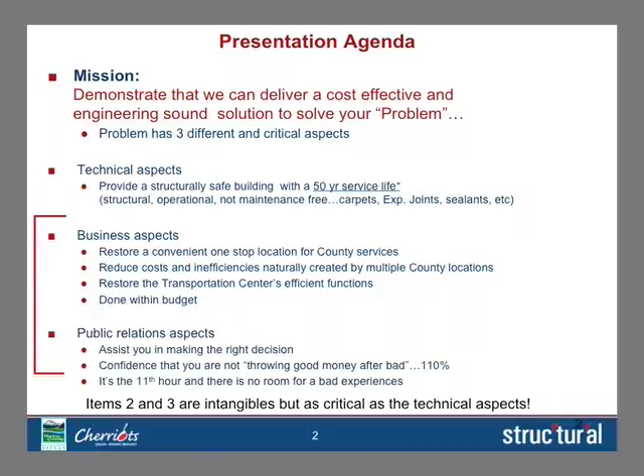So we're going to go through a process here that we'll talk about very briefly. I know in our proposal we went through all the people's resumes here. We don't want to stand and beat on our chest, but we're going to go through the companies represented here briefly, the individuals, just as things that relate to what they bring to the table.

But more importantly, we want to go through how we're going to operate as a team. We have multiple companies here. We'd like you to understand what are the roles and responsibilities, lines of authority, and how we produce a seamless project using a team like this, and how we've done in the past.

We started out, after the RFP went out, looking at, well, we started before that, but physically on site. We wanted to get a handle on the forensic side of what's going on in the building, and specifically to get a handle on whether we agree with what's been found on a couple key items in testing of the building or evaluation. And we want to tell you what we found, what was consistent, what wasn't in that process.

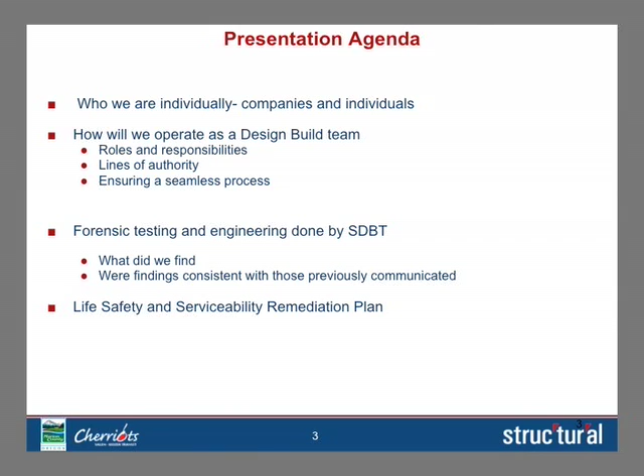And then we'll present our life safety and serviceability remediation plan.

We also want to just take a couple minutes and have you understand this is a construction process, and we want you to understand our culture, how we run a project of this nature in an operating facility. And of course, we're going to talk a little bit at the end about schedule and cost and closing remarks.

So to start out, Structural Preservation Systems will be basically acting as the general contractor and contract holder in this process. We are recognized as the industry's leader in this business in the strengthening and repair of concrete structures based on the fact that we have done 15,000 projects in repair and restoration.

And in the design-build world, we have been trusted with structures on design-build teams on structures like the Guggenheim, Fallingwater, the Supreme Court, IMF, the New World Trade Center, and some structures that aren't so marquee like you see there on the right, that refinery in Texas. That ugly-looking structure makes $1 million a day.

And people put their trust in us to literally hold that structure up. It weighs 2 million pounds, and we take the beams out from under it and put it back together while they're online so they can keep operating. And we have a history of doing these things out of town and linking up with local other businesses like you see sitting here. We're about a $400 million financially strong, very capable company from a capability point of view.

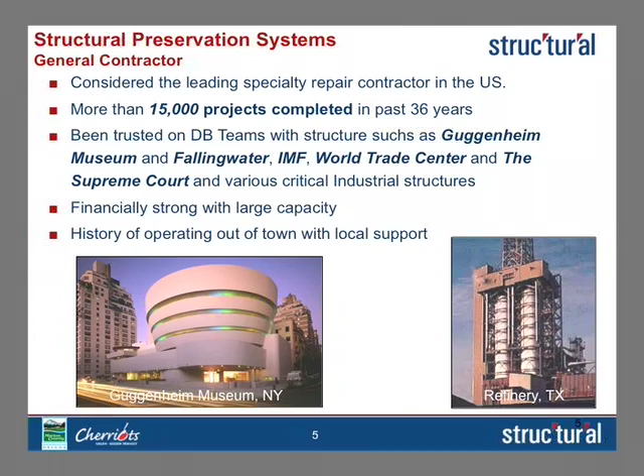WDP represents one of the industry leaders in the evaluation and repair of post-tension structures and building facades. They've done over 700 projects, and they also have some very good expertise in forensics, which is very valuable in this process.

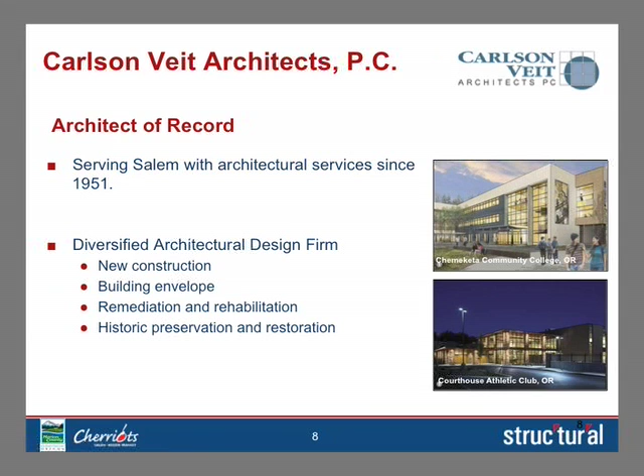You probably all know Bill Pease from BMGP. Bill Pease's company has been operating since 1925, as well as Carlson Veit, who is also a local company here in the architectural world since 1951 and has been involved in a couple of notable projects here.

Dalke Construction, actually one of the oldest family-owned construction company in the state, has done about 1,000 projects in 90 years. They will be acting as a local contractor to work with us through some contract arenas, and I'll go through some of the details.

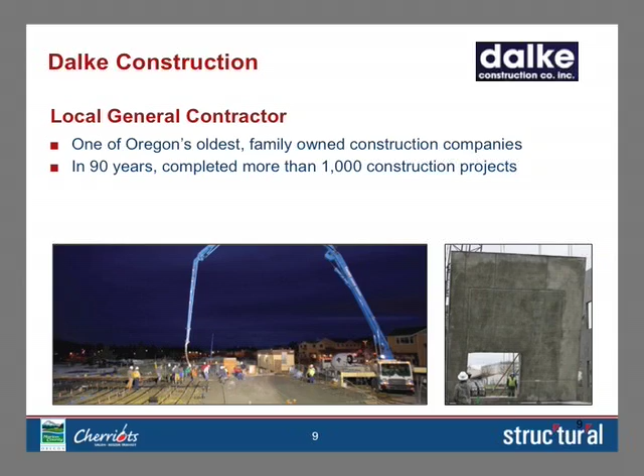We've also connected with MEP Consultants EESI, who did the MEP analysis for you. We felt they'd be a great fit since they know the building well. When we go out of town for jobs like this, local flavor and spirit helps, and there's a lot that can be done by local carpenters, workers, and businesses that's way more efficient than shipping people into town.

This is a pretty typical process for us. BMGP will act as a key part of this, as we typically do when we go out of town. BMGP brings us local support - I'll show you our design process, and basically they're going to peer review everything we do. We're not putting them in a position of figuring out specialty engineering, but once it gets to calculations, it's simpler for an experienced company like BMGP to peer review our stuff, as well as they're very experienced in how the local building officials work here and how the process works.

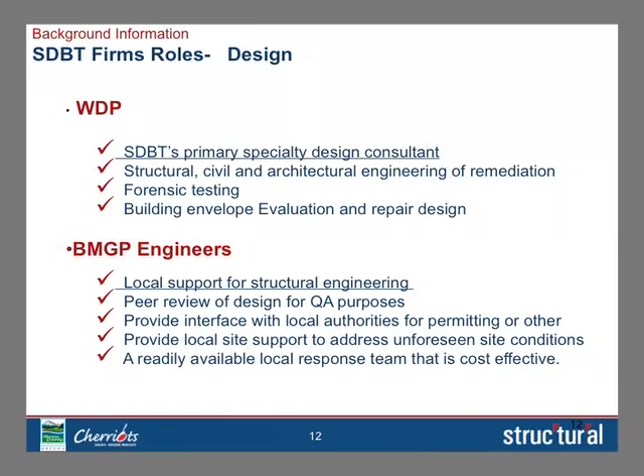This is a restoration project, and I guarantee there will be changes and unforeseen conditions. We want an experienced engineer set of eyes that's within minutes of the job site, not having to get someone in here a day later. We want to connect Bill Pease and the engineer of record to communicate and work things out with somebody local. It's just more cost effective and keeps the process going.

Carlson Veit will do architectural work in this process, more on the building envelope, but mostly things that could affect ingress, egress, parking issues, fire, and LEEDS rating. For example, we're going to be doing enlarging of concrete elements in the building, so we have to be careful about space and ingress and egress. There's things we're doing to the fire system because we have to move it out of the way and make sure it goes back in the right manner. There's also some architectural finish items they'll support us on.

EESI is going to help with the commissioning and renovations of some of the things they've already told you about.

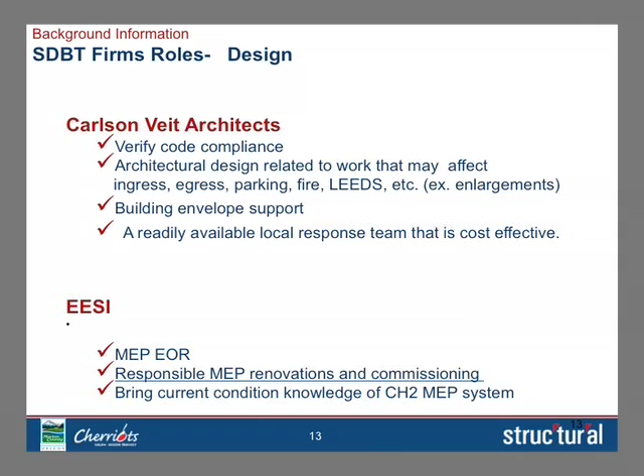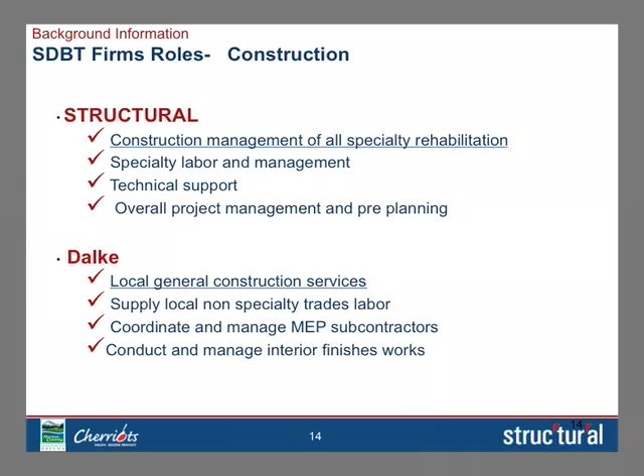We'll handle the structural work, all the heavy lifting with the strengthening aspect, bringing people out here with specialty construction experience to do that. However, a good portion of this job is local carpentry and labor support. A lot of it is finishes and MEP related, and Rich's group is going to manage that level of subcontractors for us and do all the finish work.

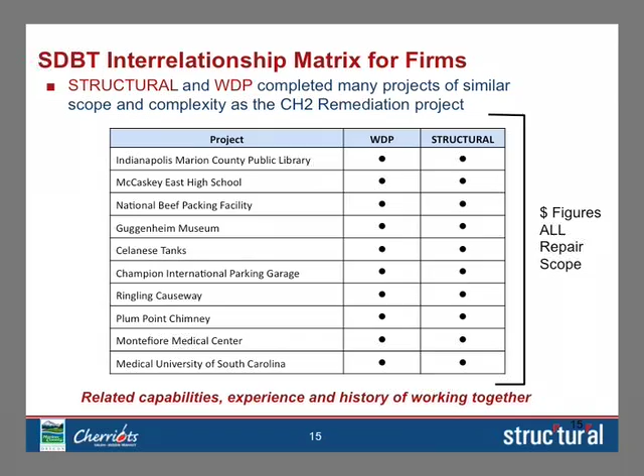One thing that's interesting - the numbers we gave you for those projects, the dollar value, is pure strengthening and remediation. It's not like $100,000 of strengthening work on a $5 million restoration of a building. It's all strengthening work.

Dr. Randall Poston is literally one of the go-to guys in this industry for any type of post-tension issues and structures. He's been in the business about 31 years, and he's the chair of ACI 318, which is the worldwide Bible for how you design reinforced concrete. He's the Peyton Manning of that world.

Also at WDP, who's going to be a structural engineer, is Dr. Keith Kesner.

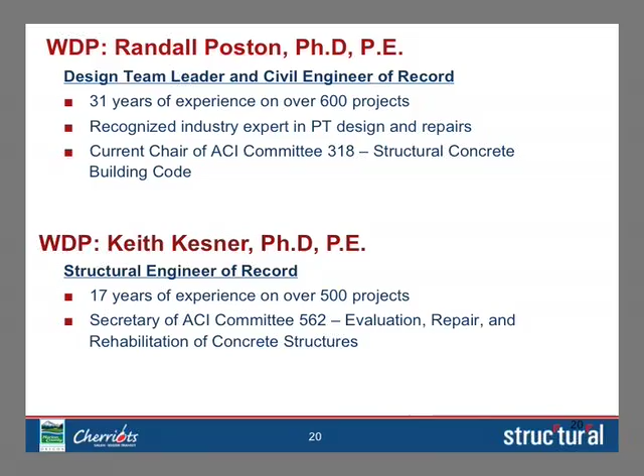And he's an official on a committee related to what we're doing, because it's the committee that defines all the repair methods and means that happen in the engineering world for repair.

Eric Peterson with WDP has been 19 years in this business, focused just on building envelope work. He's actually the chair of the society that deals with existing masonry structures and the repair of them. I'm not going to go through all their years, but you can see up there, a couple years of service and a lot of jobs.

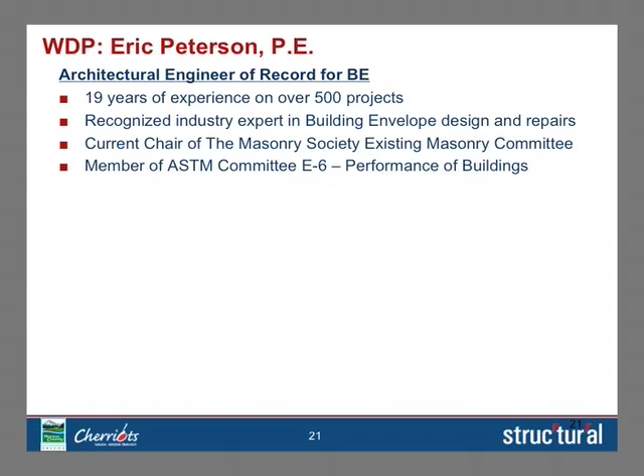Dr. Alkhrdaji works with structural. He is past chair of ACI 440, which is the design guideline worldwide that was developed for how you install FRP and how you do the design. He's been in this business for about 18 years.

I also am part of that committee, and I've got about 30 years experience in this business and have been involved in about 1,000 projects very similar to this.

So to start with the forensic thing, what did we find and what was consistent with what? Our goal really was just to get a feel for it, there was some conflicting information over time, and you had a lot of reports done in the last few years, and we wanted to get a handle on what was up. Some were consistent, some weren't, but it wasn't money badly spent. Because of the volume of testing, and we tested consistent areas where they did, it allowed us to understand what was consistent and move on to the next thing to look at. So they were actually very valuable to us in the process.

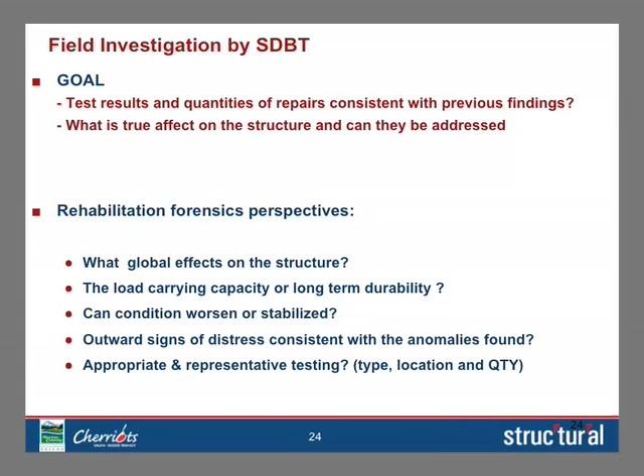The other thing is we want to understand what the true effect on a structure is. When you do forensics on an existing structure, especially when there's a defect involved, you can't just look at the lab notes. You basically have to figure out what's going on globally with the structure. Has it affected something as extreme as the load-bearing capability, or is it a long-term durability issue? Is the problem stabilized? Does it grow worse every day? Are there outward signs that are consistent with what you found in the lab? And then, how much testing do you do? How do you do it? Where do you come to your conclusions?

So what we've done in the last couple months is some visible observations, concrete core samples, ground penetrating and surface penetrating radar, which looks into the structure so we can see the reinforcing, and fiberscope, which is a fancy little microscope you can use to look around the back side of a corner and inside holes and things like that.

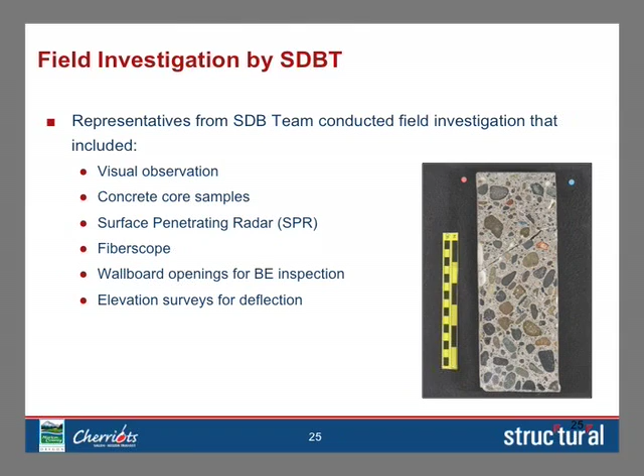We took a lot of wallboard out and looked behind it, and we also checked some elevation issues regarding this deflection thing. So I'm going to go through these briefly, but I'll spend a little more time on the first couple because they've been issues that have really been on your mind. You've been told things about them.

They've made the paper, and the first is the strength of the concrete in the structure, which was designed as a 5,000 psi structure. We sampled the same locations on every floor where you had a test before, so we had cross-reference. We tested these cores for not only compressive strength but also tensile strength, and I'll tell you why that's important in a minute. We found that the results were consistent with what you've been told. Some are above, some are below, but they averaged out to about 4,300 psi. So there's been numbers anywhere between 4,000 and 4,300 - pretty close to each other.

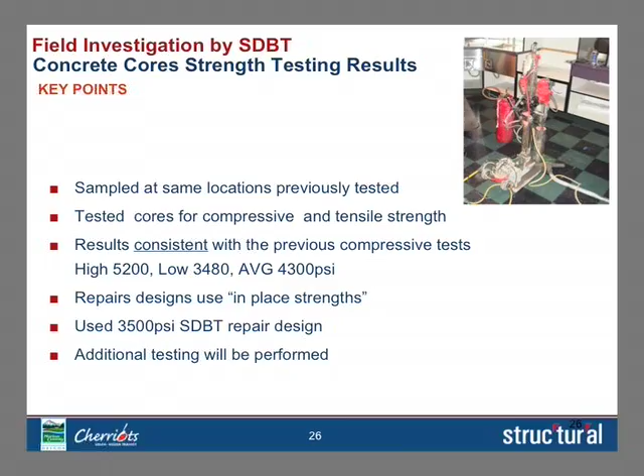So the concept here is the concrete strength is what it is. What you do is use the in-place number and reevaluate what the structure does, and you model it with that. It's not deadly that the concrete is a couple thousand psi lower - you just have to figure out what the effect is, model that, and see what it does. Since we're strengthening it, we can take that real existing capacity and work up from there. So it's really not a deadly issue. Matter of fact, all our modeling took a very conservative approach - we only used 3,500 psi in our design, and we're still able to meet the criteria to upgrade the structure. As we're going through the project, we would actually do more testing just to make sure that 3,500 is okay, and if it's not, we would adjust.

The other issue that's really been a hot potato is the micro-cracking in the concrete, which has been described as the aggregate disbonding from the cement paste.

If you look at concrete, it's basically 75% aggregate, from little sand to big stone, glued together with cement paste, which is about 25% of it. When it cures, it looks like a big dense material, but it's really not. It's just a big hard sponge.

In our petrographic review, we found two types of cracking in the concrete. The first one started in the concrete and went around every piece of aggregate. Why is that important? Because you might jump to the conclusion that it's disbonding.

When the concrete cures and becomes this big hard sponge, it's so cohesive that when you have problems—what they call delayed deleterious phenomena, something happening that creates this cracking—once the concrete is mended together, those cracks will literally go right through the aggregate. It's acting like one piece. All the micro-cracking we saw in all the other reports goes around the aggregate, not through it.

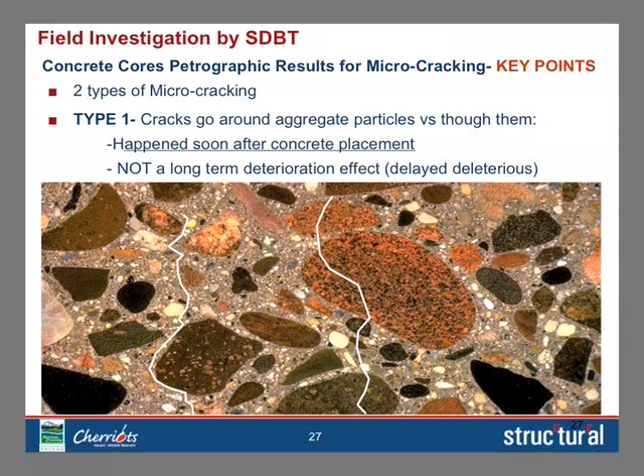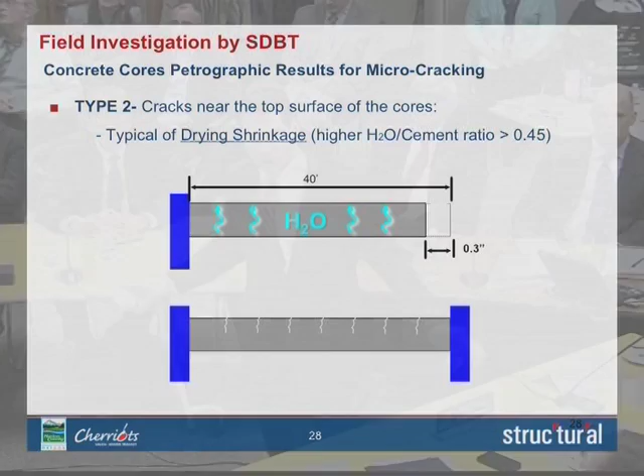The other type of cracking we saw was drying shrinkage cracking. Looking at the petrographic cross-section, it occurs very close to the top surface. Concrete shrinks because when you pour it, you add excess water to make it flow, and that water evaporates. To give you perspective, a 40-foot piece of concrete will shrink about 1/3 of an inch with a good water-cement ratio.

In the reports you've seen, the water-cement ratio on this concrete is kind of high, so more water has to come off—it's going to shrink more. If that slab is restrained by the columns, which it is, at that water-cement ratio you'd expect to see some minor micro drying shrinkage cracks. They occur at the top and do not go down through the section.

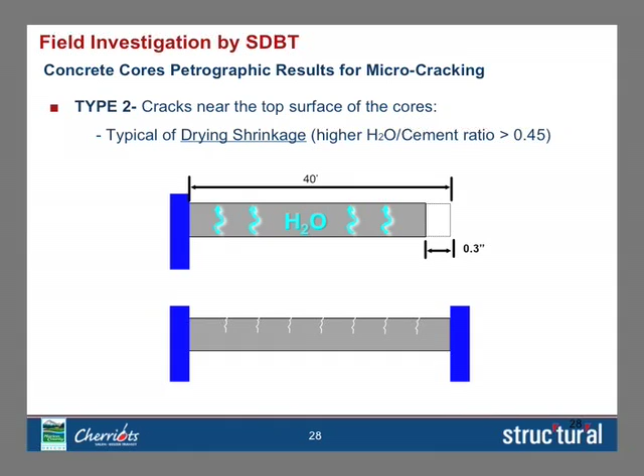In conclusion, we do not feel in any way, shape, or form that micro-cracking affects the integrity of this concrete, long-term or short-term. We base that on having two petrographers look at it, and there are no outward signs of distress, which you'd expect to see if this were debonding.

The real kicker for us was testing the tensile strength of the concrete. If there were disbonding between the aggregate and the cement paste, and you tried to pull that concrete apart in tension, the numbers would be super low. But all our testing showed typical numbers, well within the normal range for concrete at this compressive strength. So we do not feel that's an issue at all.

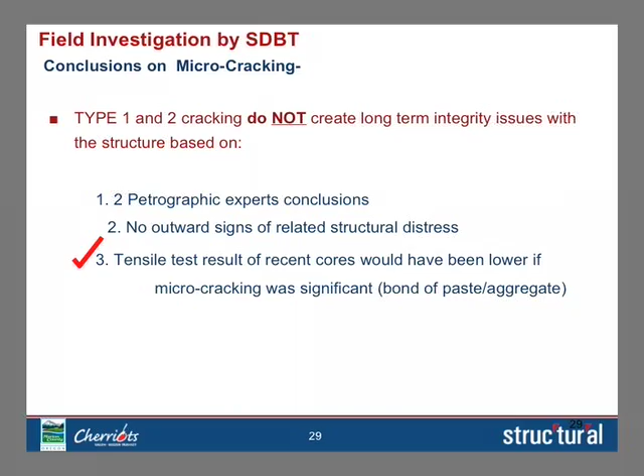Another issue with a little more legs—I read in a blog or a comment in the newspaper last week that someone said they could see the deflection from outside the building. This building is 12 years old, and there are two types of deflection. The minute the concrete cures and you pull the shoring out, there's short-term deflection—it's the load, the weight of the structure, no matter what you do, especially with monstrous spans. A 38-foot span on that outside bay is unheard of with the type of construction that was selected. You would never do that if you know what you're doing.

There's a way we can calculate what's acceptable. It's going to deflect—you can't stop it. By Oregon code, the allowable number is pretty simple: you take the span in inches, divide it by 240, and that tells you what the center deflection should be.

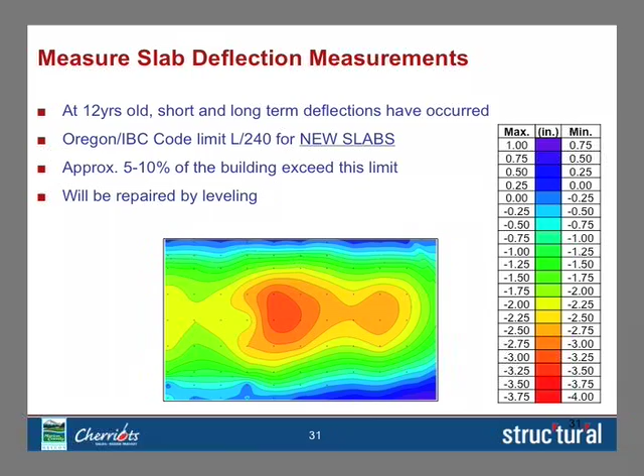Given that, we went around the building and tested a lot of areas, especially the ones showing up on that dramatic-looking colored graph with the deflection data. Our numbers actually concurred with that. But we also found that only about 5%, maybe a max of 10%, of what we checked—by square footage of the slabs in that building—actually have deflection that doesn't meet that L over 240 standard. And where they do, our plan, as we'll show you later, is to level them out.

And then on the building envelope, we found some interesting things. We agreed with what SERA came up with. There were a little bit more water leakage situations going on in various parts of the building. We had the luxury, by dumb luck, of being in the building during your January monsoons, which the wind and amount of rain is probably more than what Eric does when he goes out and does a water test on a building. So we pulled a lot of drywall off, and we were really able to see what was going on.

And we'll explain some of the details of what we found. The roof membrane looks to be in good condition, needs a couple minor repairs, but the exterior masonry has been displaced so much, in multiple occasions, notably at the 5th floor and the corners.

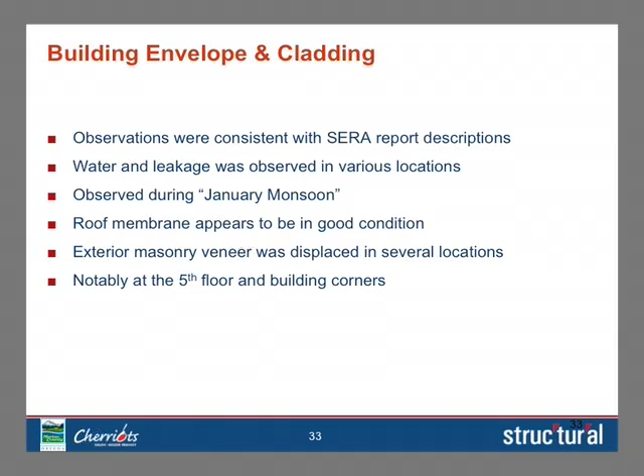I'm going to start going through some of our life safety repairs, what we found in the process, and then I'm going to go through the 3 structures, and then we'll go back to the serviceability.

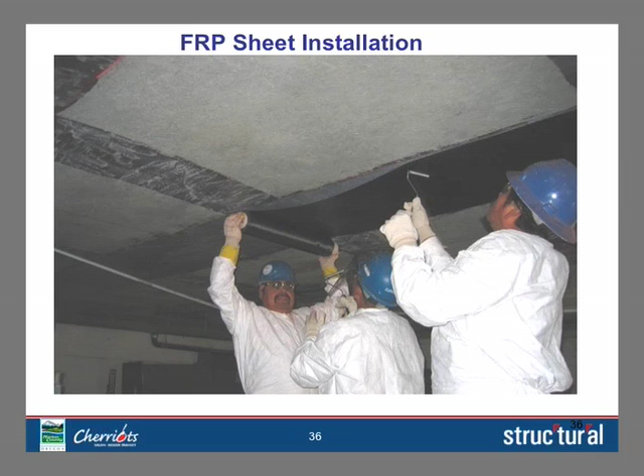But before I do that, you've probably seen this, there's 2 specific repairs the bulk of what we're talking about here will fall into. One is taking this carbon fiber material and basically adhering it to a structure or wrapping it around a column. When you have to go beyond that, now you're into a different technique. It's basically section enlargement. It's a very fancy word for we're going to add reinforcing steel and concrete to the structure, and we're going to make a slab thicker or a column bigger or a beam deeper.

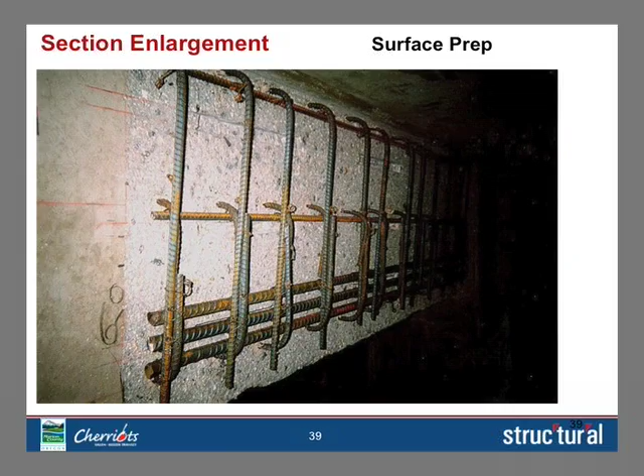And in order to do that, the tricky part is it's not like placing concrete, because at the end of the day, these 2 materials have to act compositely. So you can see the process starting here. It's a process where you have to really roughen the concrete, and then we form it up and we pump our material in there, nothing exotic, until we get it filled, and that's where it changes.

Now we have to pressurize that form, because I described concrete as a hard sponge. Our mission is to get that new material, which is a custom mix we use, a very flowable mix. We're going to literally pump it and pressurize it so it goes into the pores of your existing structure so they're one piece. If they do not become one piece, or composite's the word, basically you've added some dead load to the structure, it does nothing. So that technique is a pretty specialized technique in this process.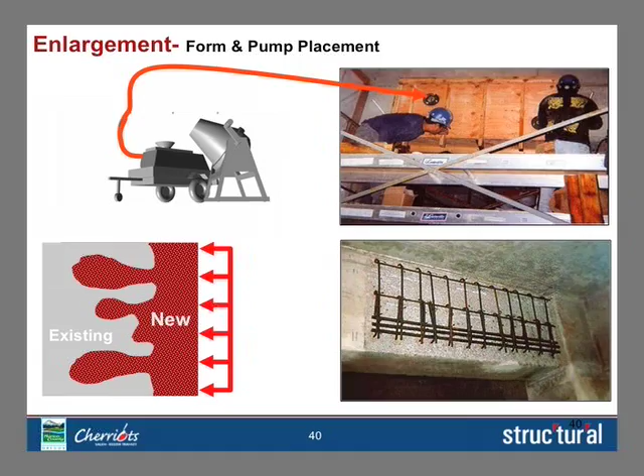The other issue with the slab, and you've heard about this probably ad nauseum, is related to the amount of post-tensioning in that structure, and the forces in there have shrunk the slabs. And you've probably heard the term elastic shortening or shrinkage.

What we found was very consistent with the SARE report, but we have a different conclusion of what some of the results we're going to do are. When you put 350 to 500 psi, which is way more than you would ever do on a normal structure, but we understand what the engineer was trying to do. There were such long spans, they had put so much post-tension force to keep that long bay span at the edge of the building supported, they had to do that.

Now, what happens is when you have that structure under that tension or compression for so long, it shrinks. And you can calculate what that shrinkage is over time. But there is no real code that says you can't put 350 to 500 psi. What it says is, if you put 350 to 500 psi in there, you better account for the stress or the relief of that as that building wants to move. Because if you lock it up, you're going to have all kinds of problems. And basically, that's what's happened to your facade.

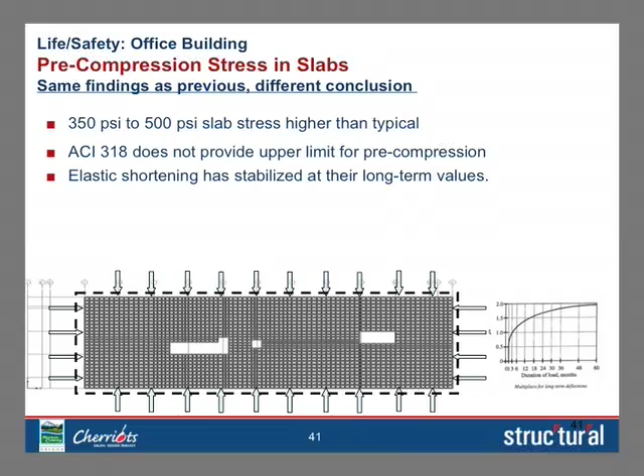Now, elastic shortening has happened. You probably have had 90% of that happen. We've calculated what it is. We've compared it to the SARE measurements. They count. So that shortening, that force, is all basically shrunken. It is what it is now. It's not going to change anymore.

What's interesting is, when this is from the SARE report, if you look at the second floor, third floor, as you went up the building, that elastic shortening got more and more and more. It could have been related to the concrete quality or stressing, but at the top floor, at this roof, the shortening was much less. And the only thing we could come up with out of the old reports was they added a chemical admixture to the roof slab that reduced the shrinkage.

It was a shrinkage compensating admixture. So maybe that, or maybe there's less post-tensioning, but for whatever reason, the difference between where that shrunk and where this shrunk is the biggest in the building, which is why there's a major problem with the facade at the top of the building. It's trying to pull it in, and it can't.

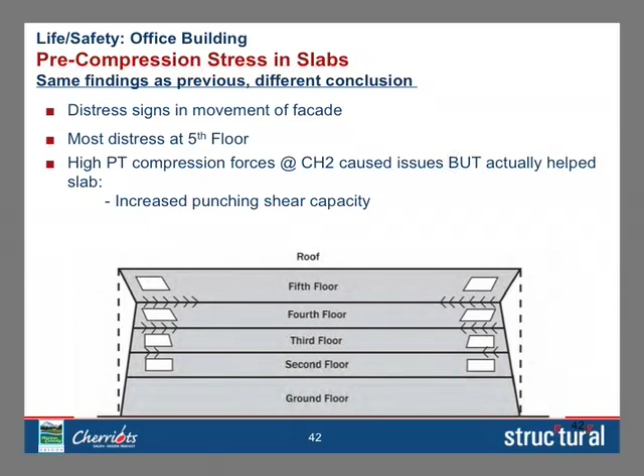And believe it or not, your building uses studs to hold that masonry system in place. It's a very flexible system. Some people like it, some people don't. But if they had used something more stout, you'd have had a major problem. Luckily, it was flexible enough to move to where it did. It probably would have been much worse if it was a different type of facade.

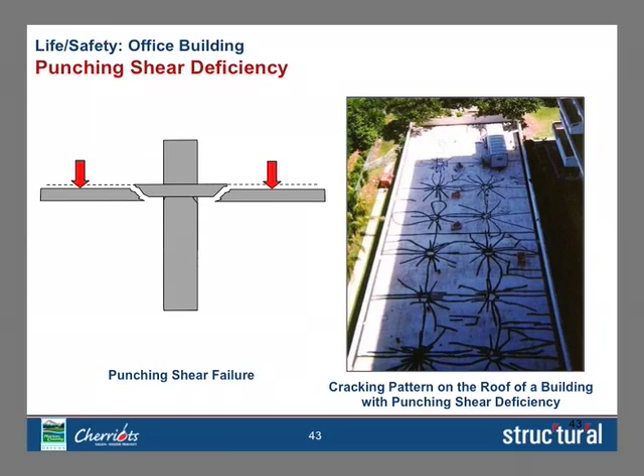The other thing with the slab you've heard is punching shear. You've got a situation where, kind of like my pen in this paper, the slab's trying to punch through. And it's a pretty dramatic failure.

What we selected was drop panels. We are going to enlarge the bottom of the concrete, and the size of that depends on how big the span of the column is supporting. As described before, we'll roughen the surface, add reinforcing steel, pump into that void overhead, and pressurize it so we drive the concrete into the pores. You end up with a nice piece of concrete in the structure, fireproof, looks like the rest of it, and it solves your punching shear problem.

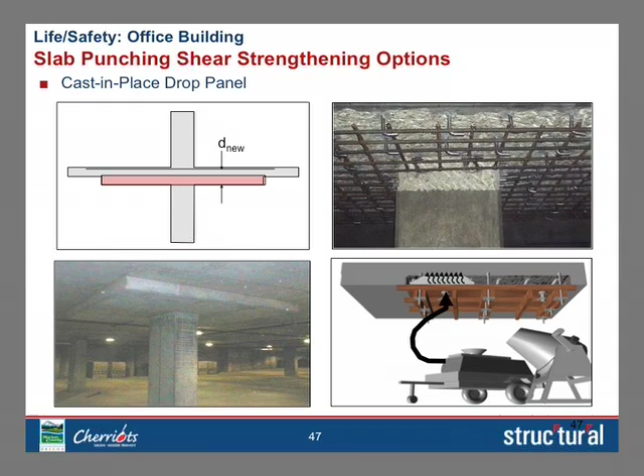Another thing we found was some column issues that were reported in the SARE report. On the first floor, you've got these very high, 16-foot slender columns, meaning the width to the dimension of that column is a little bit thin for what it should be. The concern is not the axial load. The concern is it's so slender, it could buckle. So these were not identified in the other report.

And then on floors 2 to 5, just about every column has a problem with axial force and bending. Unfortunately, given the percentage, we cannot just wrap carbon fiber around it. It will not meet code.

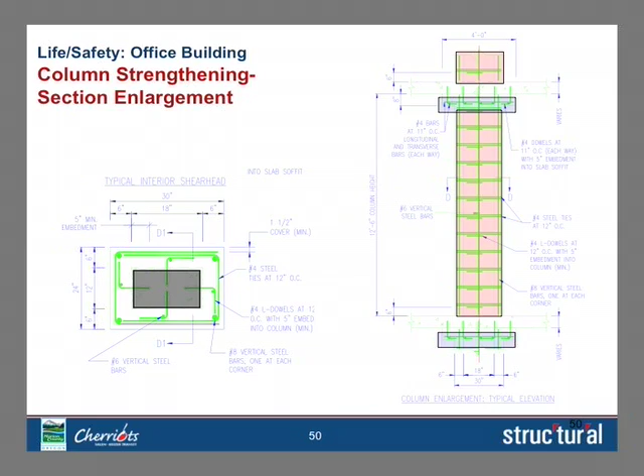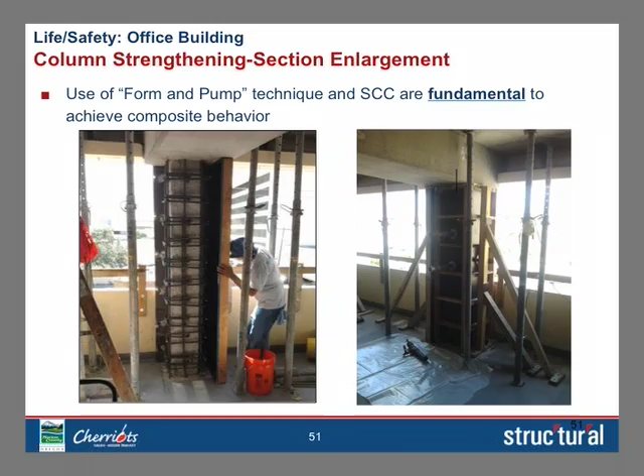The other issue in the building is the bending capacity of the slab in the office building, and the bending between the columns, basically how it's bending in the middle. So we're talking about having to do something on the bottom side of the slab between the columns to strengthen it. There's an existing amount of steel, and we obviously can't put steel back in the concrete. So what we're going to do and proposing is to put an equivalent amount of carbon fiber on the bottom side of the slab in those areas to be equal to that steel.

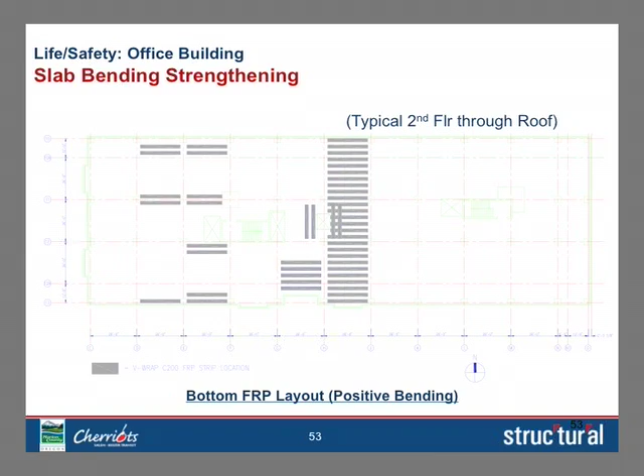And it would look like this. We would glue it on the bottom in one direction or two, depending on the design.

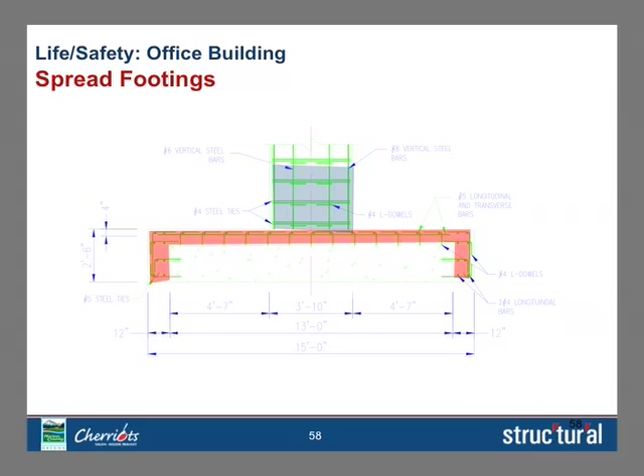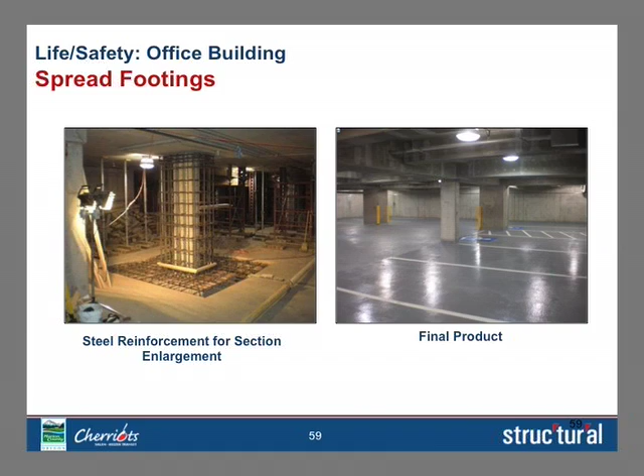Then the other thing that has been looked at in the building is the lateral support. It's the building moving as a whole, north, south, east, west, during a seismic event or during wind or things like that. The things that keep that building strong doing that are basically your west core, your stair tower, and your east core. They stiffen the building. Only the west core was shown to be deficient, which was noted before. We found the same numbers that SERA found.

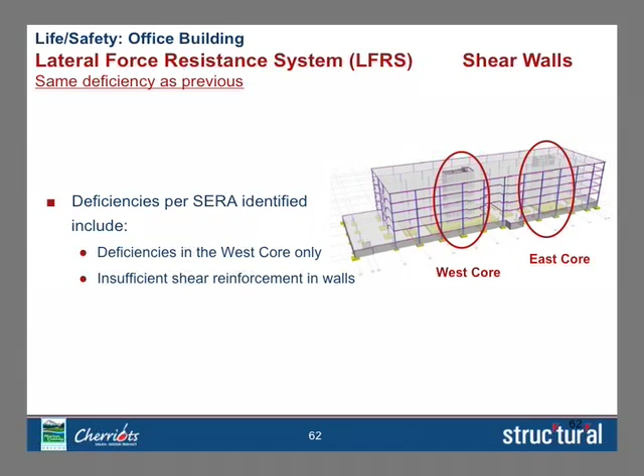Here's the stair tower, look at that in cross-section. What we found was some of the walls were deficient in shear, basically. That's why you see those cracks in them, in shear, and they're less than a 15% deficiency.

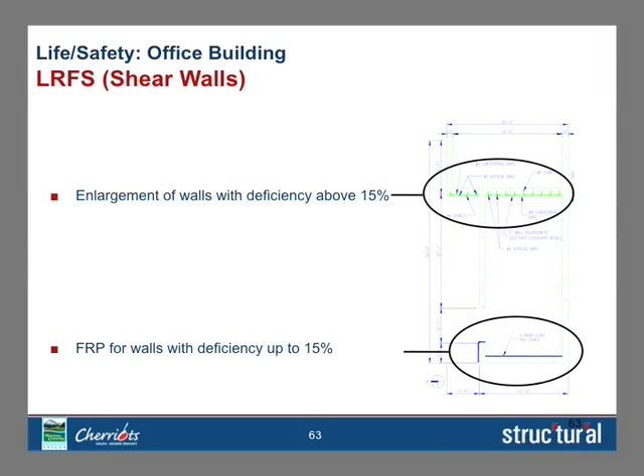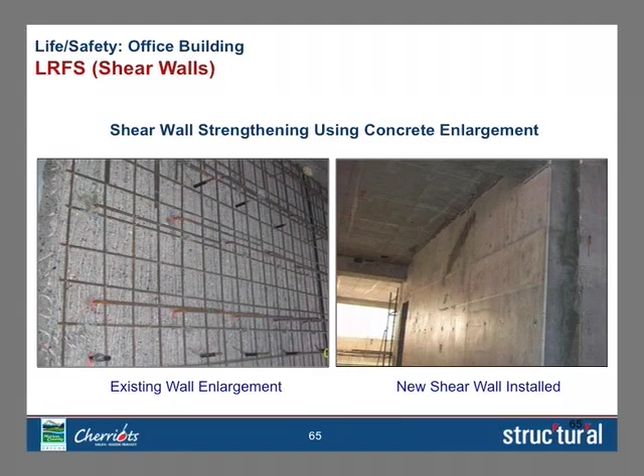We're in ingress-egress areas that have very tight tolerances for that purpose, so we'll have to design these things so that they are thick enough or thin enough to meet that criteria.

Let's shift over to the transit mall, which is a 10-inch slab with a brick paver system on it. Some forensic work was done, and they note that the membrane underneath on the deck below the pavers was probably not the right type of membrane. It was basically too soft.

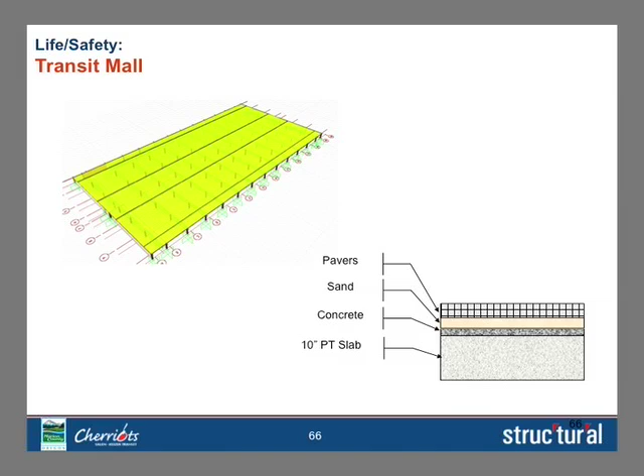The protection board that was under there was not done correctly, so it allowed it to slide around. The sand that was used was not the appropriate sand. The slab also has excessive, compared to normal construction, pre-compression in it. It's got an awful lot of post-tension force.

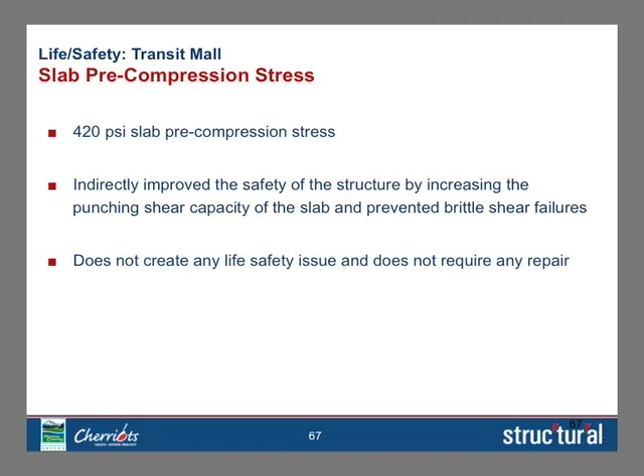However, again, like in the building, there's a lot of punching shear deficiency in that, and that's probably what saved you with all that compression in there. So it really doesn't create any life safety issue as far as having that high pre-compression.

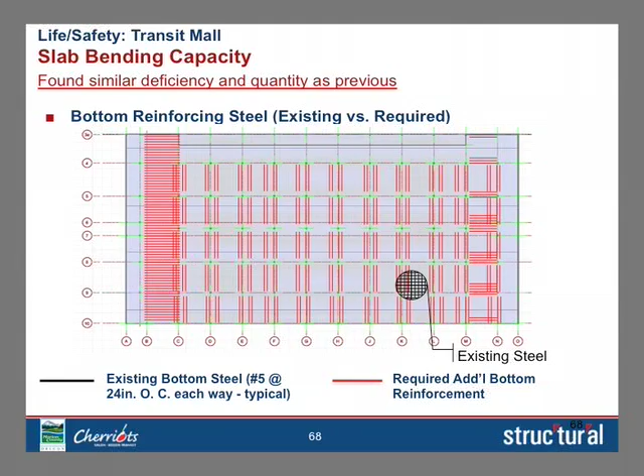The bottom steel, which is the steel made for bending between columns, is deficient. They found that was also found in a SARA report. These red lines represent how deficient it was, and the carbon fiber up there shows how we calculated fixing it with carbon fiber.

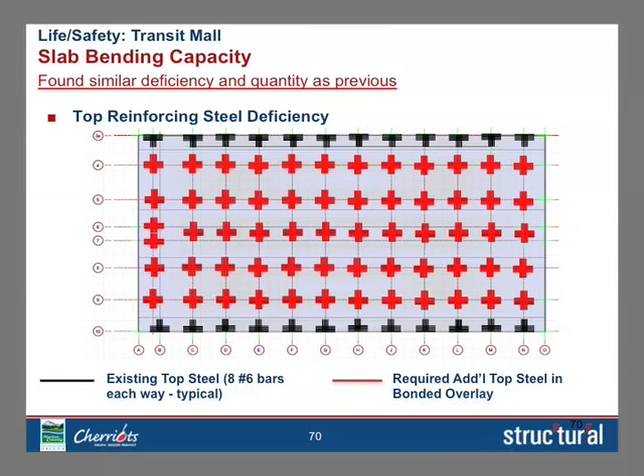On the top side of the transit mall is a little trickier. There's as much as half the amount of steel in there that should be in there for bending. If it wasn't for that high level of pre-compression, you probably had a problem. So the challenge is it's such a high level of deficiency that you can't just put carbon fiber on top.

What we propose to do is use a bonded overlay, and that bonded overlay is going to kill a few birds. I'll explain. For one, we're going to bond a concrete surface on top by taking the pavers out. We've now got a nice void there to fill up, and we're going to bond a bonded overlay in there that's going to have all the steel that's required in that overlay.

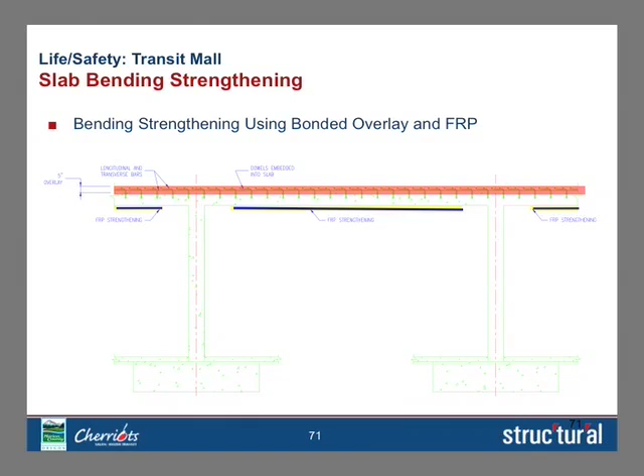It'll be a nice, dense material that'll act as a reinforcing system. It'll also act as a wear surface for driving on. The other thing we found in the garage was there's also punching shear deficiencies.

Same as in the building. Now, the challenge with this is the deficiency in punching shear is so high that if you put a drop panel in, punching shear is a function of depth. To put a drop panel in there, it has to be so deep that you would completely foul up your clearance in the garage.

So what do you do? Well, what we came up with was we designed this overlay to not only be an overlay for the bending and a wear course, but we designed it such that we can put a much more shallow drop panel in there because we combine the same two systems.

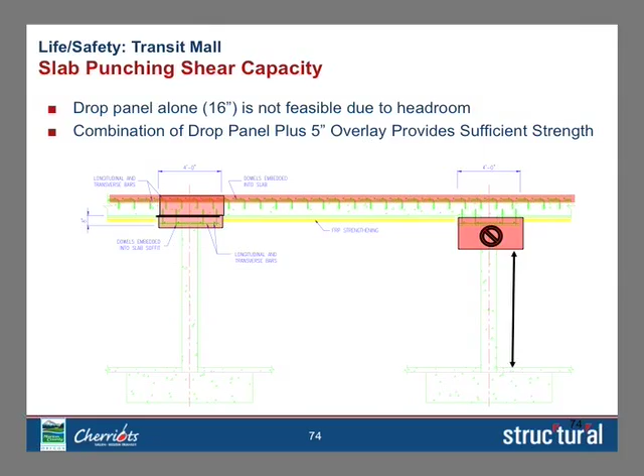So that top surface is acting as multiple scenarios as well as a new drainage system. It's helping with the punching shear. Otherwise, you've got a problem with height clearance. So we have to come up with a way that removes a paver system that's probably going to be problematic for a long time.

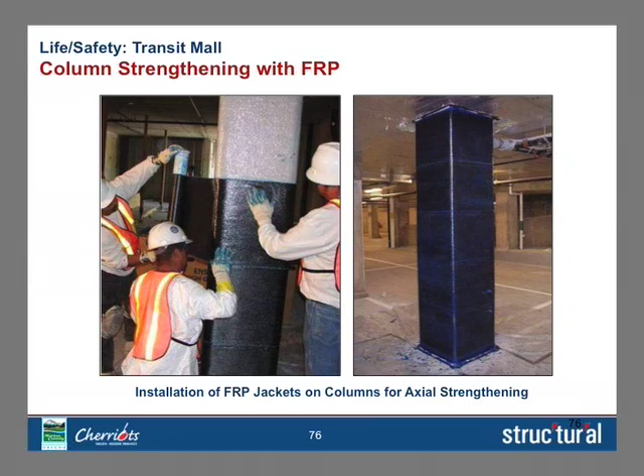We also found some columns in the garage that were deficient in axial capacity, but their level of deficiency is such that all we've got to do is wrap some carbon fiber around them. Won't take up much space. We paint them. Very innocuous.

Just to switch over to the north block, one of the questions that came back to us was related to what did you design your repair for the north block. Frankly, there's not enough information that we could glean as to what the load, capacity, or demand is on that, because I'm not sure what you're going to put on it. I don't think it's ever been determined. So we picked 100 pounds per square foot in our design.

That load would cover for you if you ever put vehicles on top of it, or if there was ever a gathering area, or made it a plaza deck. That would be the appropriate load. What we suggested was either you supply that to us and we could comment and do an analysis, or if you ever develop that, you could save that analysis for the engineer of record on that project.

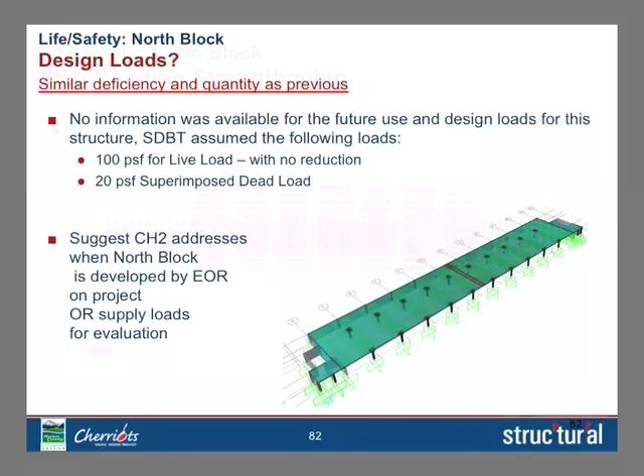In general, it also has punching shear issues. I've shown you what we're doing, so I won't go through it in detail. It also has some issues where we're going to have to put carbon fiber on the bottom of the slab for bending.

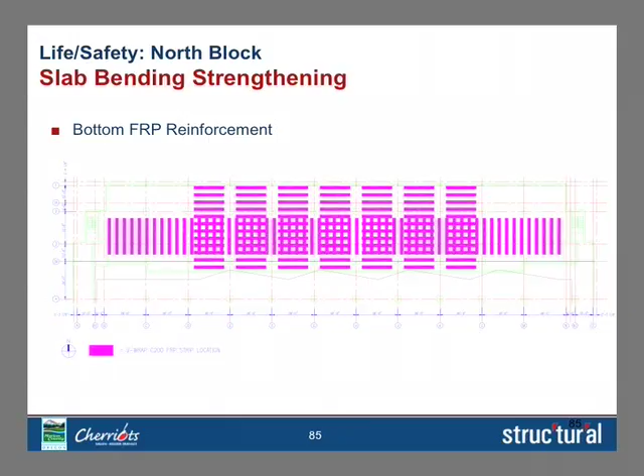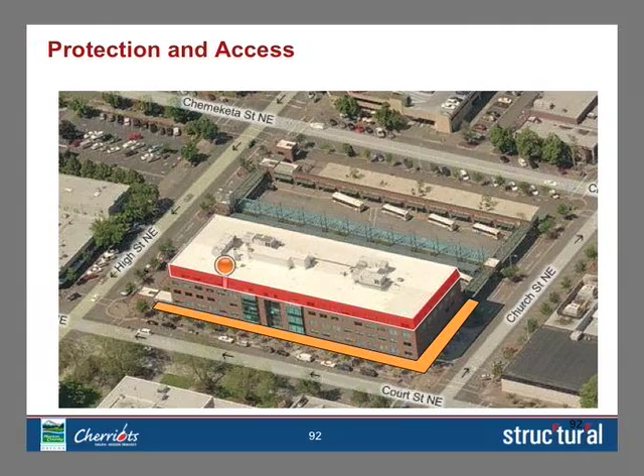If you've ever seen anybody work on a building facade, you'll either see suspended hanging scaffold going up and down on a motorized system, or a system mounted on the ground that takes workers up on what looks like a big long elevator. We may use both depending on where we are in the building, but in all cases our proposal includes building sidewalk safety bridging so people can access 360 degrees around the building instead of shutting it down. We put lights under it. Sometimes it's a bit wider, but we have it built into our proposal so you can keep street access around the building.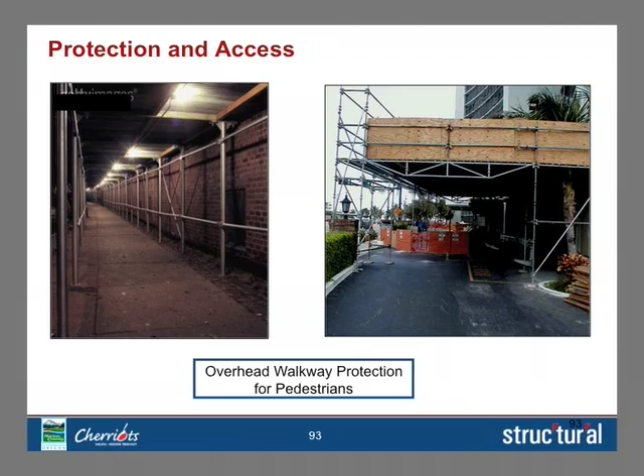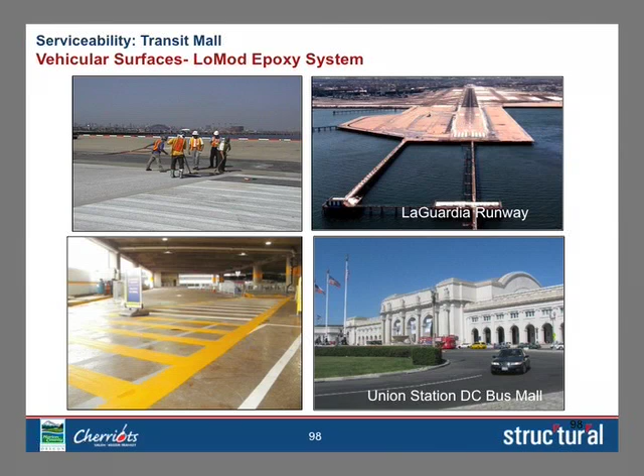I will applaud you for thinking out of the box. You've taken a lot of different approaches to this, and I think by soliciting design build specialists from this arena, you've pushed this thing over the goal line, because now you have a complete package where these jobs are as much about construction as they are about engineering. When you package that up, you get a complete answer and can make an informed decision. I applaud you, because as a public entity, you don't see that too often.

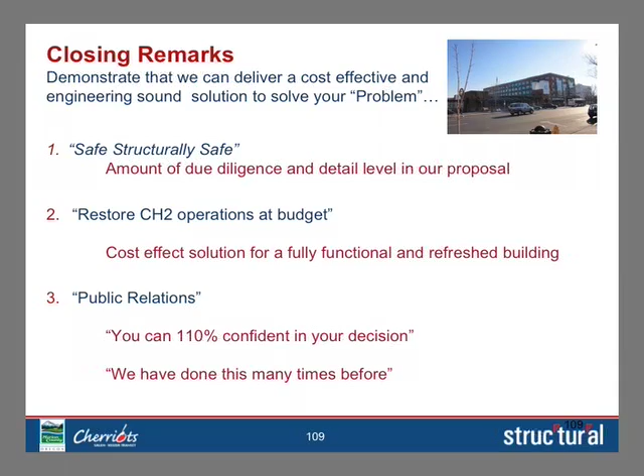And lastly, you've got a pretty hard decision, and I'll use the term 110%. I'll tell you that if you go forward and select this team based on our past history, I hate to sound cliche, but we have been there, done that many, many times, and you will be 110% happy that you picked a contractor and engineering team like this. This is something we do day in, day out, and we will deliver what you need.